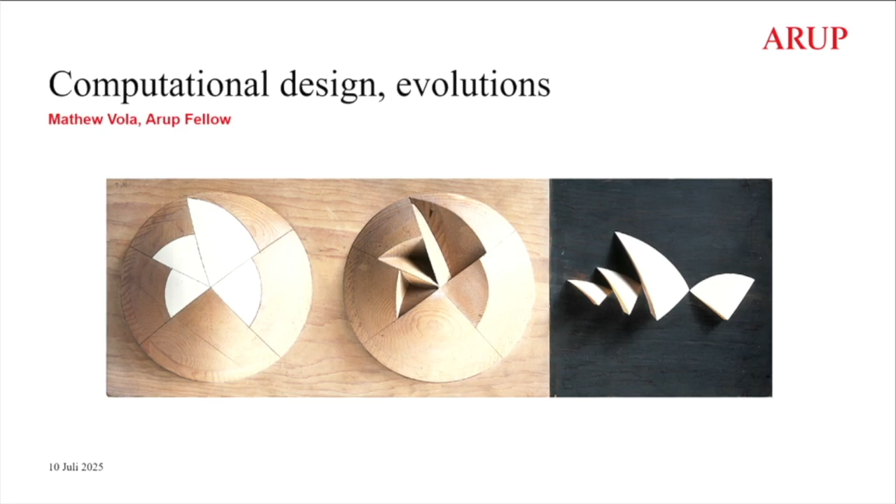We're an international firm, about 19,000 employees. But what separates us from the competition is that we are employee-owned. So in 1970, our partners said, okay, we put the shares in a foundation, and the benefactors of the foundation are our employees, that's me, and all the other ones, and a number of good causes that we believe in.

And what we've learned over the years is that if you're an employee-owned firm, then what keeps you together, what keeps unity, and that's branding. So we tend not to buy other firms, we tend to grow organically, but particularly what binds us is to drive for quality in each and every project that we do. And that's been successful. We've been growing, and growth is not a particular objective of us, but we've been growing organically for the last 75 years, and now we're at 19,000 people across the globe.

And we're a multidisciplinary firm, so we like to be outcome focused. So we're not structural engineers that just design a structural beam, but we want to think about what's the beam for, how does the mechanical services go through it, what's the objective, which people are occupying it, and that's our field of play.

The first project we used computational design was probably our signature project, the Sydney Opera House. We were a big fan of simple calculations, hand calculations, but then we helped Jørn Utzon to win the competition for the Opera House, and we just couldn't fathom to do this by hand.

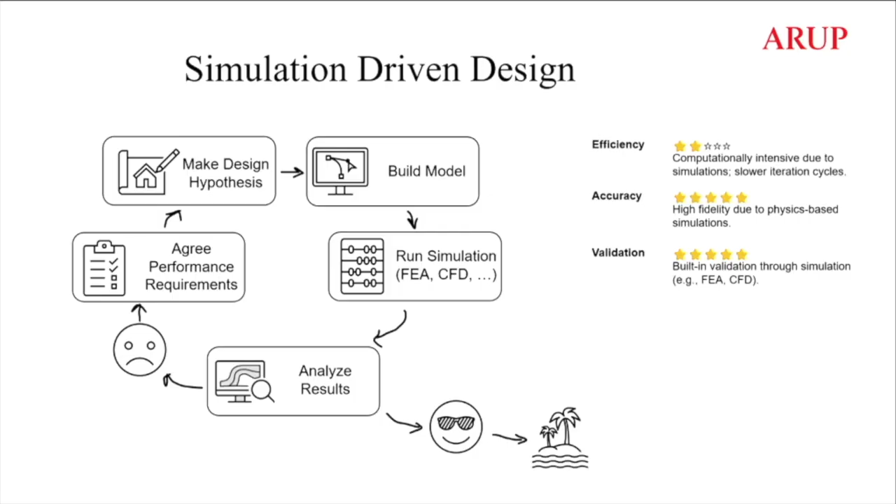If that's not okay, then you do another hypothesis, and you run cyclically, and it's iterative, and it's a lot of pain before you get to paradise.

Okay, then this was around the time when the architects learned how to do 3D modeling, and they hit us engineers with a lot of these 3D models. Can we do this? Can we do that? And basically we couldn't keep up.

So what I started doing was connecting these geometrical models through parametric design, and Grasshopper is a great tool, so we totally use it and love it, but there were other tools before that to keep up with it. So we built parametric models, so we didn't look at one solution anymore, but we could look at a solution space. Within these constraints, this is the optimal result, this is the minimum steel tonnage, or this is the one you could build. And by doing that, we could keep up with these demands.

But really, the design process itself didn't change. There was still an assumption, right? And it wasn't a design, but an algorithmic assumption. And within the algorithms, we could look at the solution space and keep up with it to get to paradise.

The thing is, if you create a solution space, if you have one single model running in an FEA analysis, the result is validated, because you have an engineer who looked at it and checked it off. If you create 100 or 1,000, and you come to an optimal result, you still need to validate it. But what we've learned through the parametric process, we're kind of certain it works.

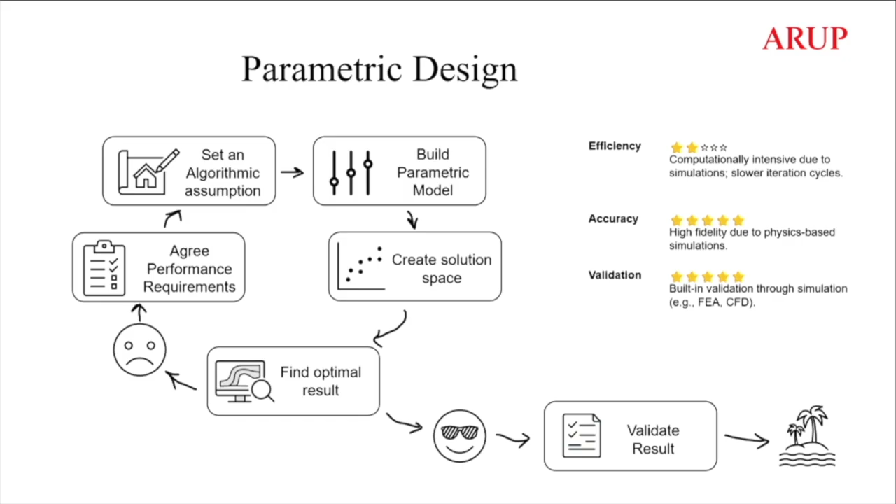And we're kind of certain to be happy, so we present the optimal result to a client, and then if we sell it, then we validate it. So that's the process. But times move on, we have to be quicker and cheaper and more lean and stuff.

And now we have machine learning, and in a way this changes quite a bit. So now we take the data. I've seen examples where data was taken from external sources. So this is the process.

Now we take the data, we train a model, we predict an outcome, but when I have that outcome, I'm not quite sure that I can present it to an external client. So now what I do is I validate the outcome, I validate my prediction before I go to the client, and if it's happy, and the client likes it as well, we get to paradise again.

But the validation part actually takes longer almost than the using of the machine learning itself, and that's a bit of a problem. So what we started doing is actually to merge those processes. And in a multidisciplinary environment where you look at environmental analysis, wind, daylight, comfort, energy, embodied carbon, all these kinds of constraints, there's a lot of different processes we're running simultaneously.

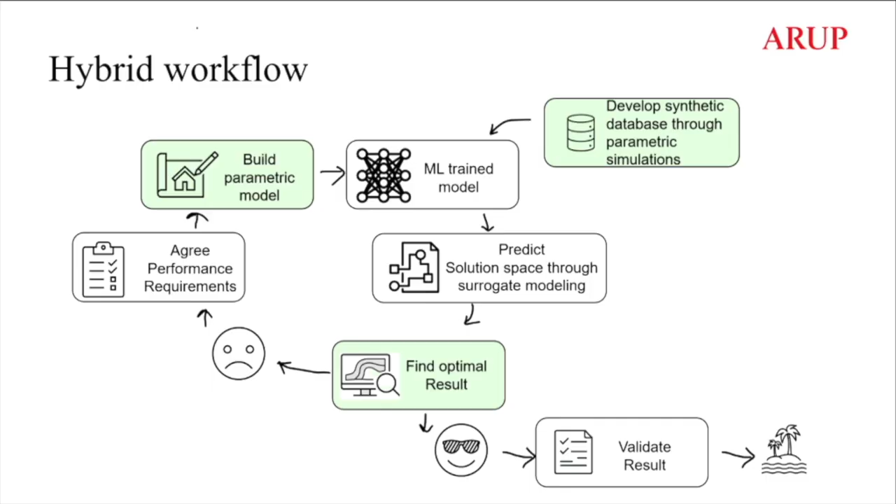But what we said is if we now use our parametric process to generate synthetic data, we can trust that database, and we kind of can trust that machine learned model as well. And at the same time, if we use a parametric model as input in the machine learning trained model, we can again get a big solution space, and understand the whole system at large, which gives us the confidence to go to our client, validate it if it's been solved, and get to paradise very quickly.

So that's about computational, and this is what we're doing for a lot of workflows. One of the things that we're very comfortable with in the Dutch environment is we train the machine learning on wind comfort. CFD analysis takes a long time, 4 hours per model. So if I'm at the stage where I want to influence an architect to maybe change a tower shape, or maybe build 2 towers instead of 1, my potential solution space is very, very large.

I'm talking about thousands of options. If I run the CFD on all those thousands of options, I cannot do it. With machine learning I can, and I can keep up with it. And then I can mix the wind comfort with structural analysis or settlement analysis, and suddenly there's a different ball game happening.

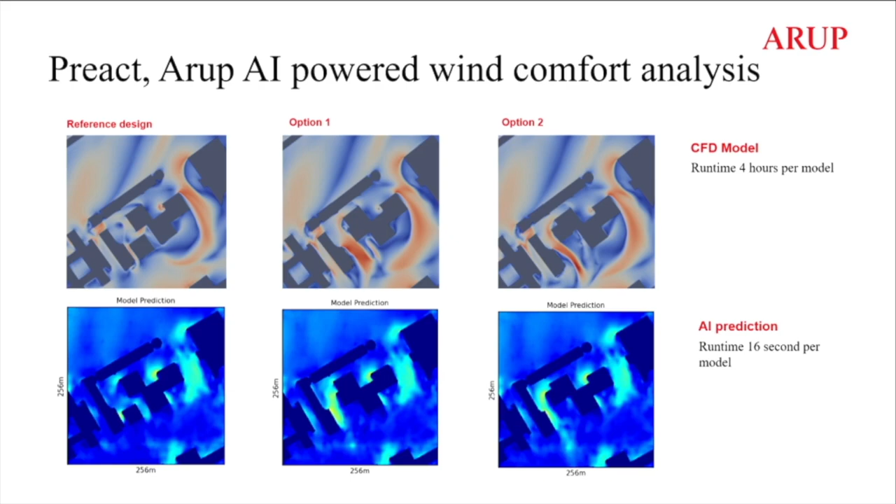And we started doing that for wind comfort. From wind comfort we're now doing thermal comfort, blast analysis. It takes us even longer to come up with one calculation in a traditional way. One column with one blast load takes us about 6,000 euros in computation costs. Now we can do it in seconds, totally unlocking that solution space for our clients at an early stage.

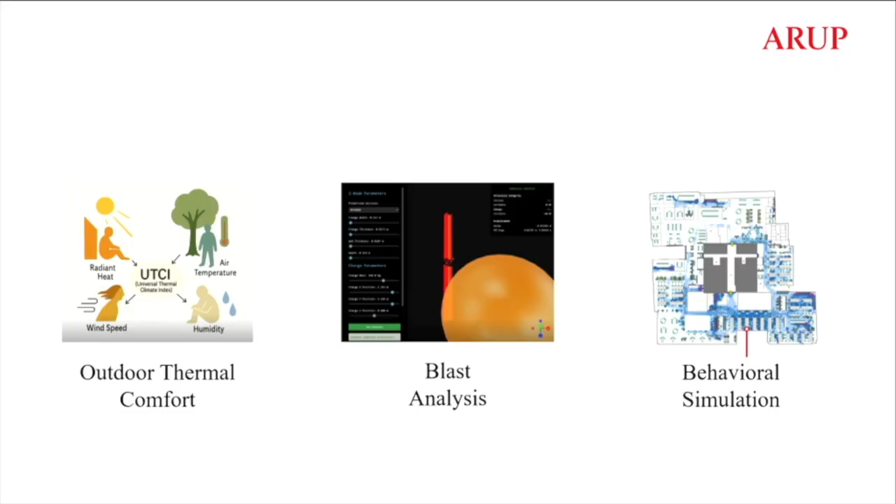And that computational power now leads us to design for more outcome-based solutions. So we're starting to do behavioral simulations. Can we design for happiness, right? Instead of anything else. That's the direction we're taking when it comes to computation.

Now, we'll park that for a minute. If you're up for it, I want to talk about design. That's probably what sets us, the AEC industry, apart from the aerospace industry a little bit, and for sure from the very specialized prosthetics industry: in our case, we have many different stakeholders. There's not one client actually making the decisions. So design, as we see it, is probably a little bit different than some of the other industries are seeing it.

So I just want to test with you. I'm showing you some images, and maybe somebody wants to give us one word for what they see when they look at this image.

Tensegrity, good word. Somebody else?

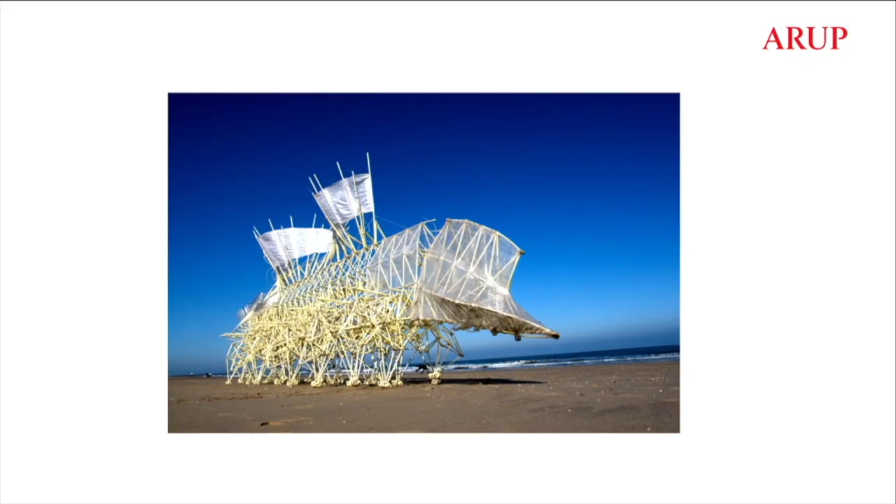This is Theo Jansen. He's a Dutch artist, and he devoted a big part of his career to making beach animals. He made them always using PVC and a certain connection mechanics, and his animals became more and more complex over the years. And he let them run on the beach.

One word? Fun. Good word, good word.

For me it's complexity. As a computational designer, I like algorithmic complexity, because anything that's not codable... and this animal is almost totally codable. It's a lot of code to actually do the one exception, unless the exception is actually the rule, but then it's algorithmic again. And I like looking for these in my designs, and it will help our database, it will help our solutions, etc.

For me, and this is important, it's about choice. So when you work in a multi-stakeholder environment with a lot of different perspectives, we have to realize that design is also always about choice.

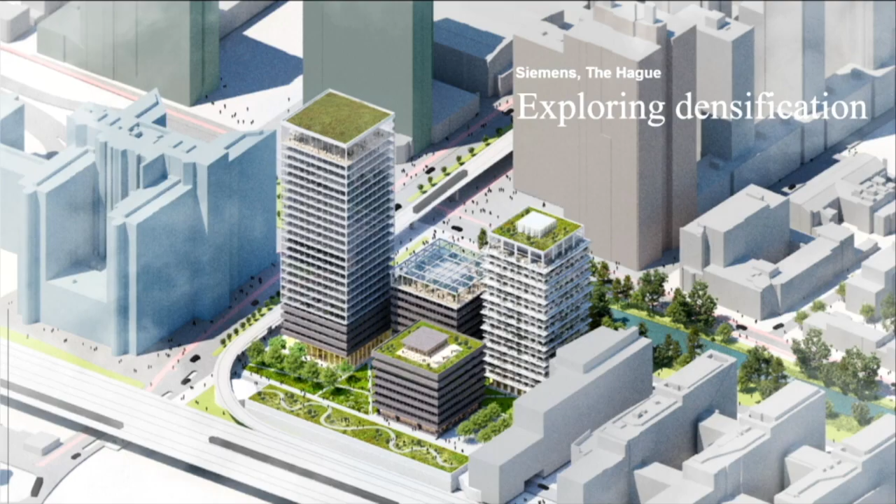And that's something I try to fix. So I got two project examples. One of them is Siemens, where we tried to do this.

So this was a densification scheme where the architect made a reference design, and that was a starting point for us. These are three existing buildings in The Hague in a quite complex location, because this is a residential area, and the residents are quite vocal about anything that changes in their neighborhood. And in the Netherlands, particularly when they're very vocal, they can stop any development happening. There's a train track, a lot of noise problems, a very busy road, a tram line, and existing buildings.

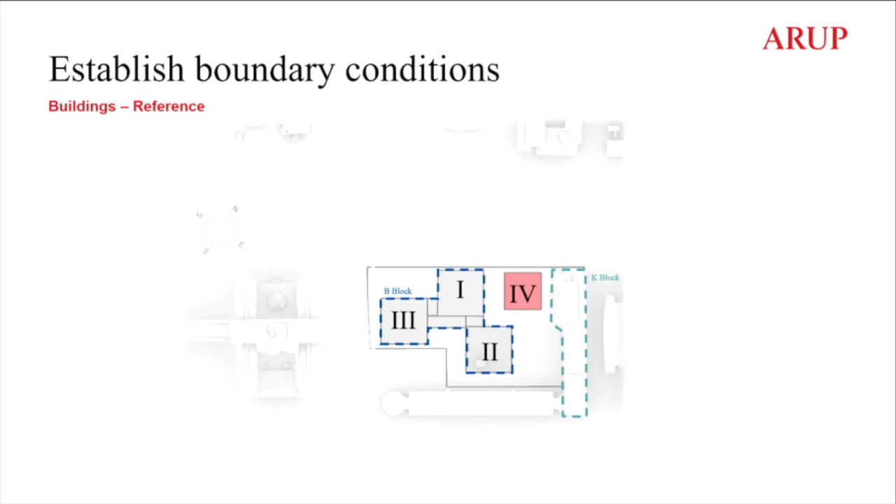And the client, Timeless, wanted to explore if they could densify the particular site, adding a commercial area and a residential area in a different tower block. Traditionally, I think it was a really good design - if you look at it from a master planning perspective, you put a building block here, there's area, this is the residential tower, it's at the street, and we build up and put a commercial tower on top.

That reference design was done, and then we were asked to bring in different perspectives - environmental, structural - to that particular mix, and we closely worked together with Timeless and NEO as the client in that Ikigai model. We took care of the engineering, and ZTDP was the architect. Then we said together, okay, what are the different perspectives we need to bring in: gross floor area, sunlight, the sun on the park, particularly sunlight on the neighboring precinct. Basically, we said they're so vocal, we don't want to put them in the shade at all.

So it was a pretty important KPI to move forward with. Also, we were going to be constructing on a live site where people had to work at the same time. So constructability was important, daylight for the residential quality, commercial as well, solar potential, because we might want to do an energy neutral building, because a lot of commercial clients are promising that they will occupy energy neutral buildings. We had to look at the noise from two roads, and this is actually a train station, so a lot of people actually passing our site as well. So wind comfort was also a very important KPI.

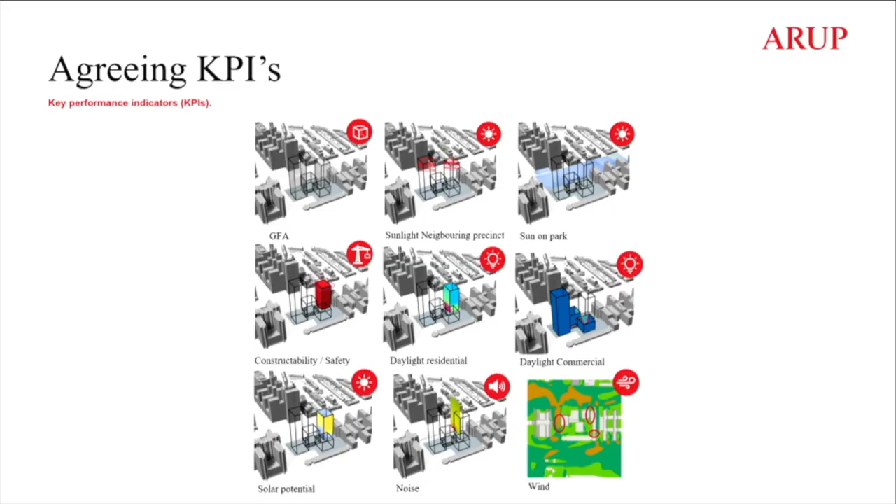Now, these are nine different sets of KPIs, all with totally different solution spaces, right? And the good thing is that we built this pre-act, so we actually used this, and this was the first time we used it in a commercial environment. We said, okay, the wind comfort we can now predict. So all the different options, we can predict the wind, and we're quite comfortable that we're going to be right, and we tested it.

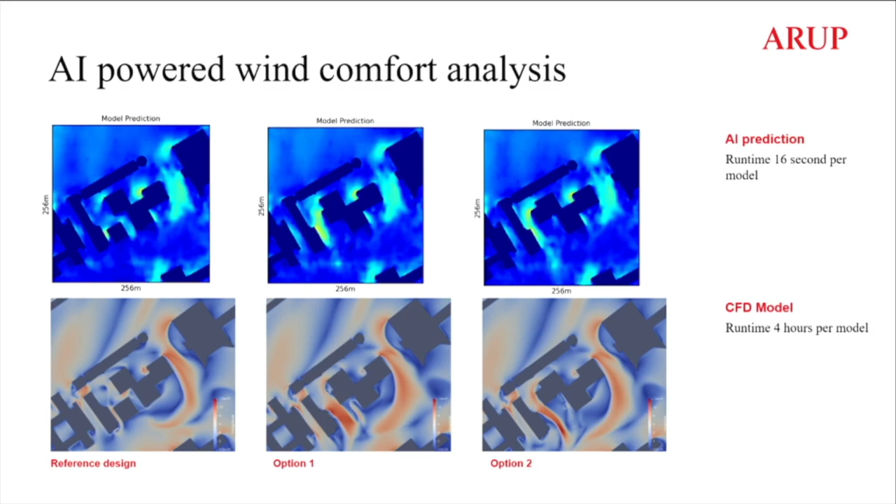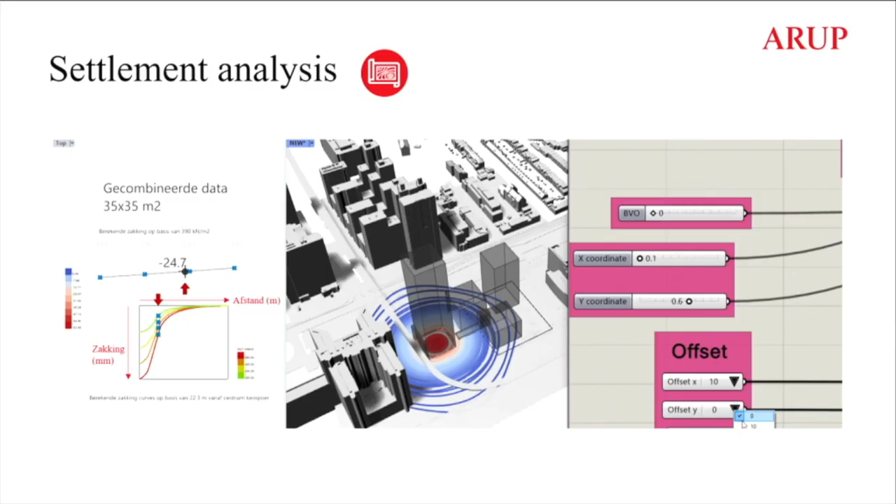We also, because of the train track, metro track here, if we would move the tower out, the metro track would start to settle. Now in the Netherlands, if you have a settling metro, then you have a lot of conversations with the people that own the metro line, and that can take years. So we said, okay, that's another KPI we put into the analysis as well.

And then basically we started to explore the solution space. You know, the client called it a lawnmower. We made different heights, different locations of both the office building and the residential building. And then we built a parallel coordinate system to test all of them, so all the solutions for the office, all the solutions for the residential.

And then they said to the architect, okay, now we restart the design. And we take all these different perspectives and see if we can find the best fit compromise, and not only looking at master planning, but also looking at all these other ones, including settlement, wind comfort, daylight, etc.

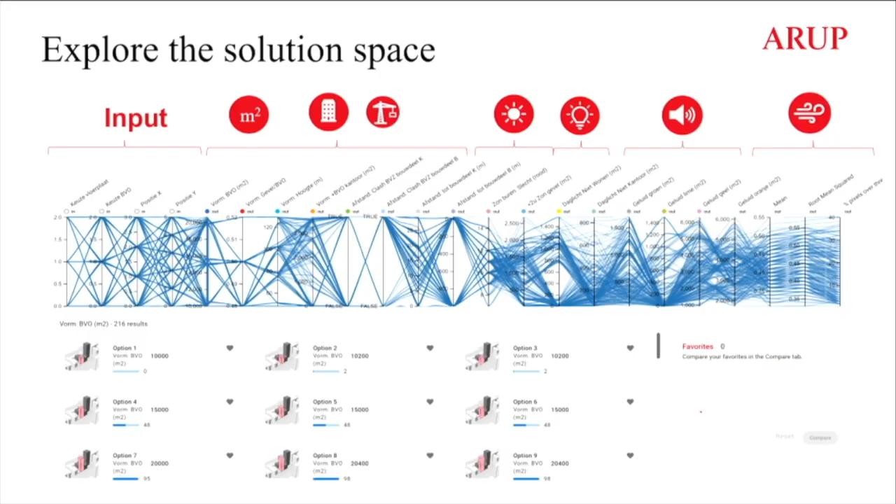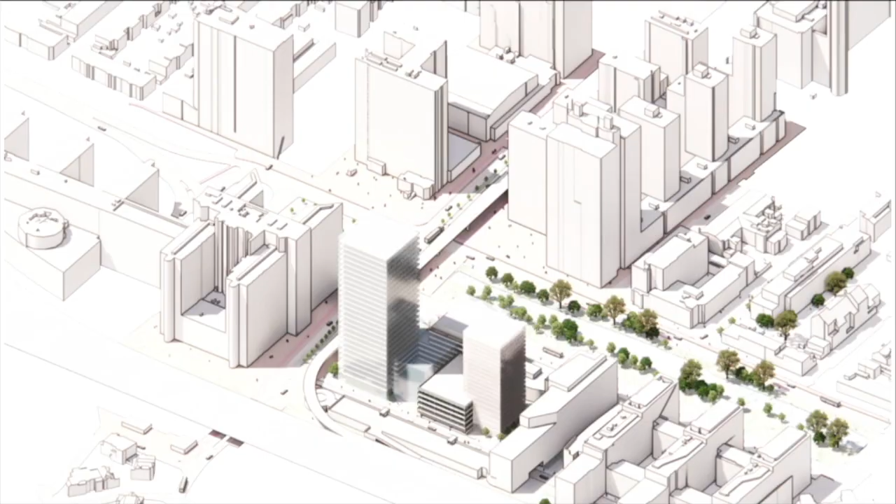I won't dwell on this a little bit. And the outcome was totally different, right? So one thing for the residential was we found, well, we learned through this analysis that if we would put the residential building back, we didn't need any deaf facades. So a deaf facade is when you can't open your windows in your residential apartment. So pretty important KPI for the end user of the building.

And if we had to put it on the road, this facade had to be deaf. If we put it on the rail, that facade had to be deaf. In the middle, it was fine. So that became a very important design decision that eventually led the architect to say, okay, you know, we'll do it differently. We'll make a nice square here and create a different environment.

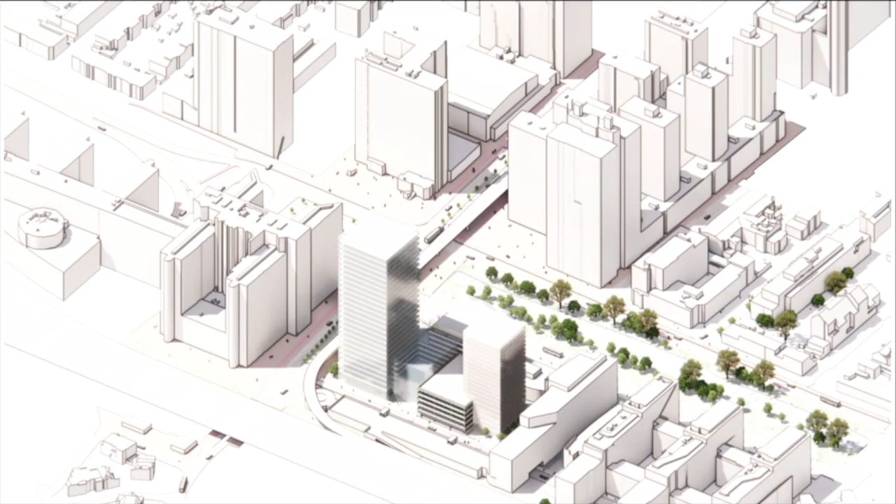Same goes with the commercial tower, which we moved in the back. And actually, by moving this one back, the whole wind comfort at the back side improved significantly, right? Creating a safe space and a happy space for the people to move daily from the station into the zone, which made the government very happy, right?

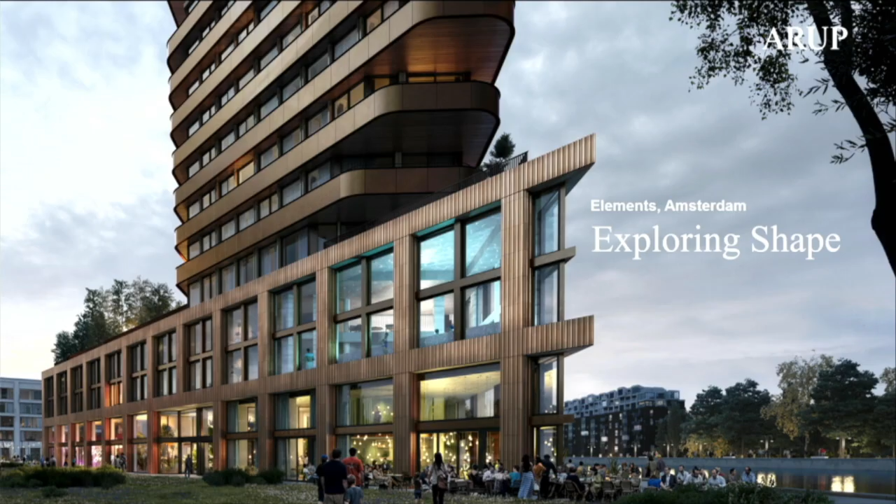So that's one. So that's actually using computational design technique in a collaborative environment to decrease the risk and come up with the best fit compromise solution.

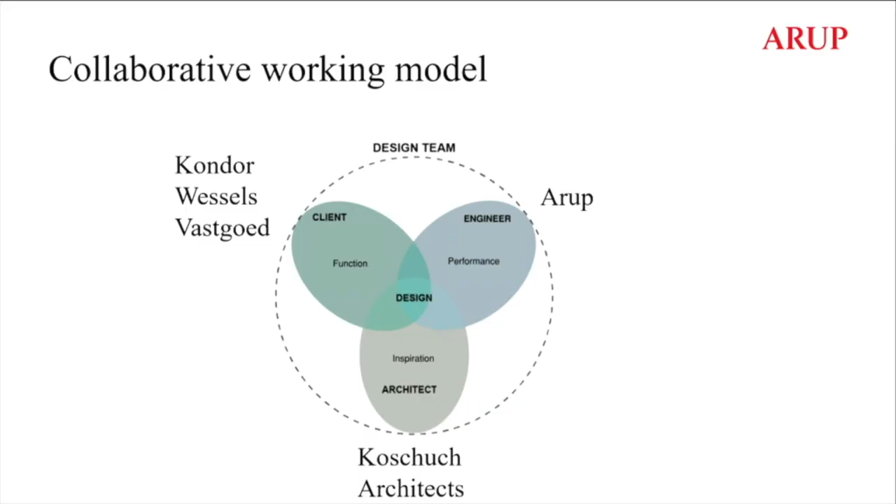Now we set up this Ikigai model, in a tender stage. We had six weeks, not a long time, so we said we keep it small. We take responsibility each for their own work. And obviously designers make a lot of decisions, some of them implicit, but here we said, okay, before we start the design process itself, let's set up what we need to do.

Because in the end, a design is always a marriage between the boundary conditions, the constraints, and the ambitions, right? Let's do a parametric generative script. We look at all the solutions, generate all the solutions, we do the analysis, and then look at it, similar as we did to the Siemens result.

Before we started this whole process, we read the tender documents and asked, how are we going to score the most points in the tender design? We decided to set 2 KPIs for building sustainability, 2 for neighborhood sustainability, and 2 for planet sustainability: daylight and sunlight for the building, good wind conditions and green space for the neighborhood, and energy performance and material for the planet.

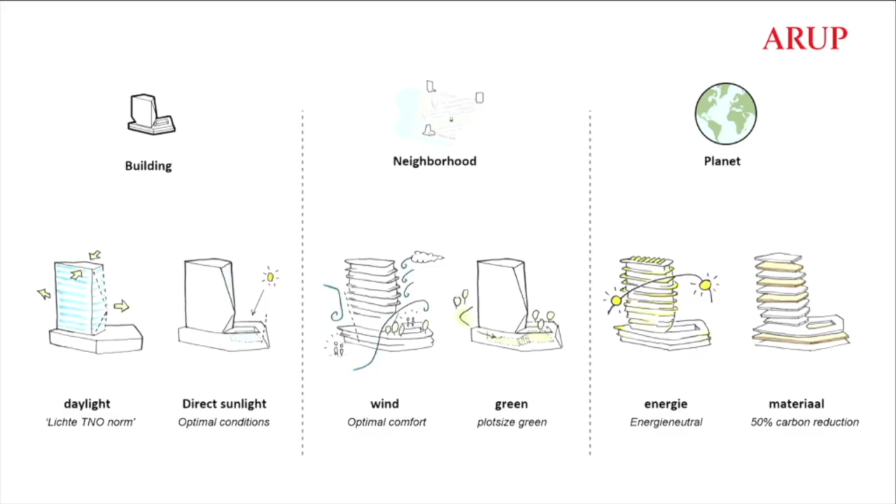This building was in the same neighborhood, the Amstelkwartier, and the tender before that was the HAUT project, a total timber tower, which we also won. So for this one I thought we'd focus on energy, since we knew we couldn't afford a full timber tower on this particular location. We took 50% instead of 100%, focusing on the first energy-neutral timber residential high-rise building in the Netherlands.

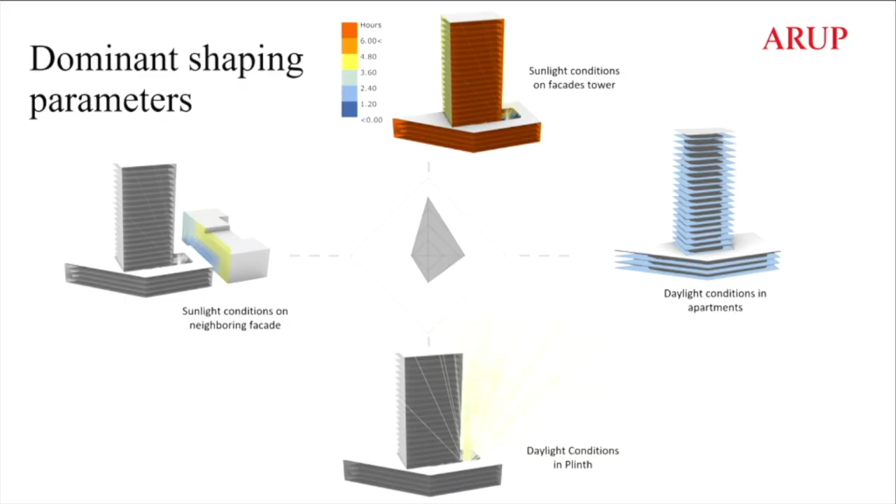Then we started looking at what shapes we could do. This tender was nice because any shape would be acceptable according to the government's request, which isn't always the case, so we had a lot of freedom of shape. We explored different options. The government gave a reference design, saying this is what they thought should be done, but looking at the KPIs, we started exploring different options in an algorithmic way.

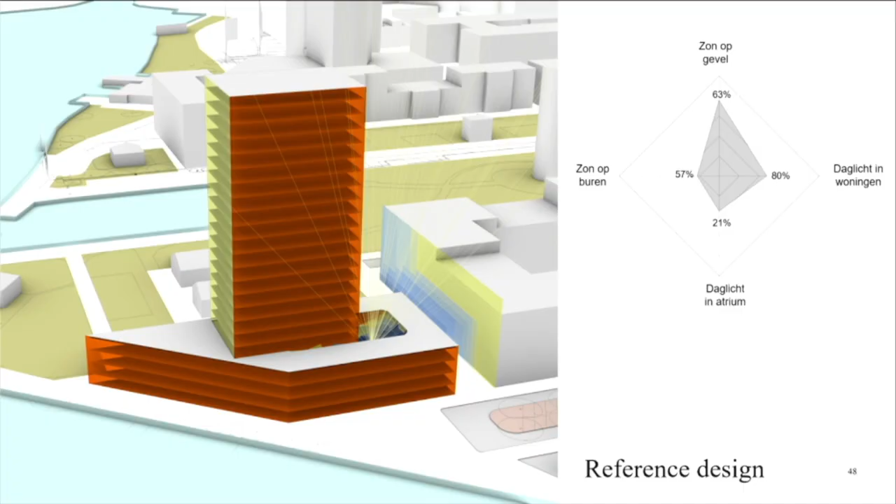We found that if we want optimal daylight in the plinth building and for the neighbors, we want to move the building as far to the tip as we could get it. Then, to generate enough energy, it actually started to pull the east and west facades apart, making a very fat building with a lot of facade on the east and west side, where you get energy in the morning and evening when most residents are using it.

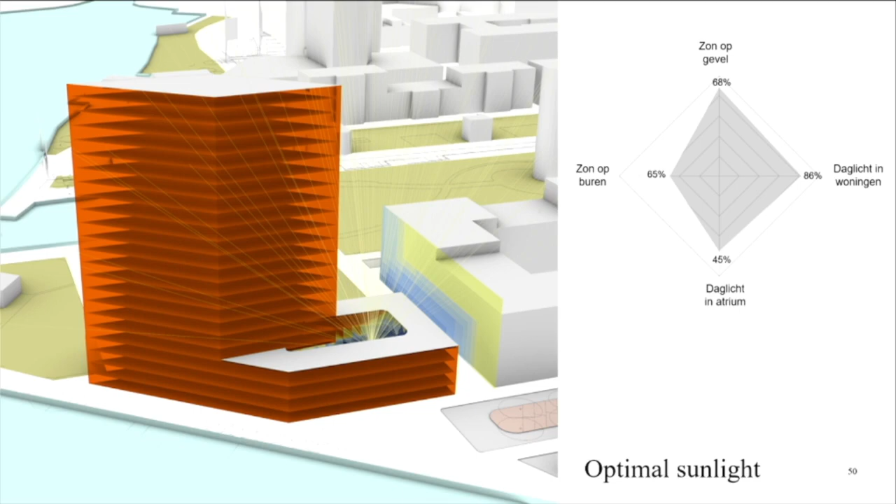What the algorithm found, and these are just some snapshots of it, was that it started to shave the building here and there. That's because when you build like that, the wind hits it and you get very nasty wind conditions on the southwest facade. So it shaved it off so the wind could find its way at this level instead of hitting the tip directly. It still hits it a little, but this was the best-fit compromise solution, the last algorithm we ran.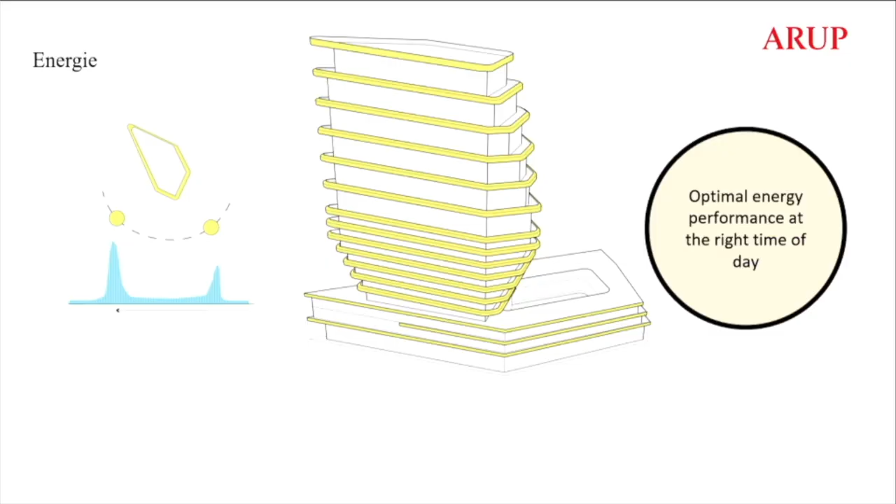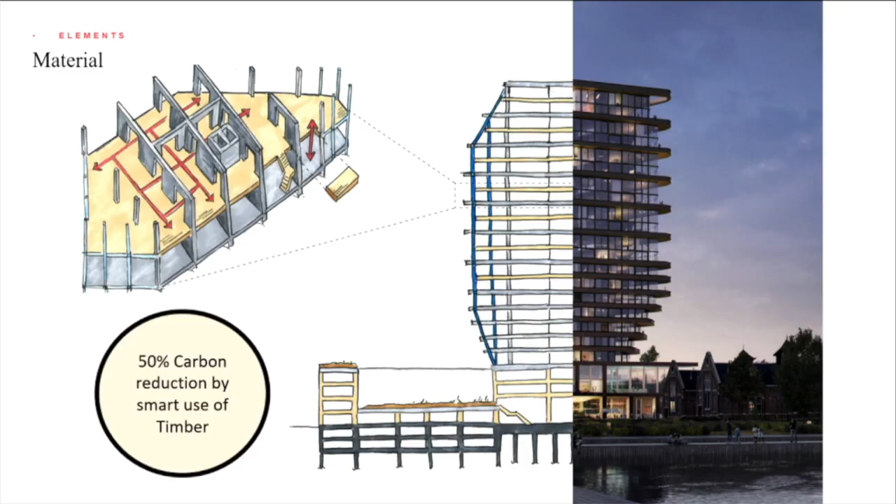Then we said, okay, we won't put timber everywhere. Let's make double-height apartments, and every second floor within the apartment itself we make in timber, because then you avoid the problems with acoustics or fire, which we thought was a very good solution at the time, and it met our carbon requirements. These are literally the slides that I presented to the client.

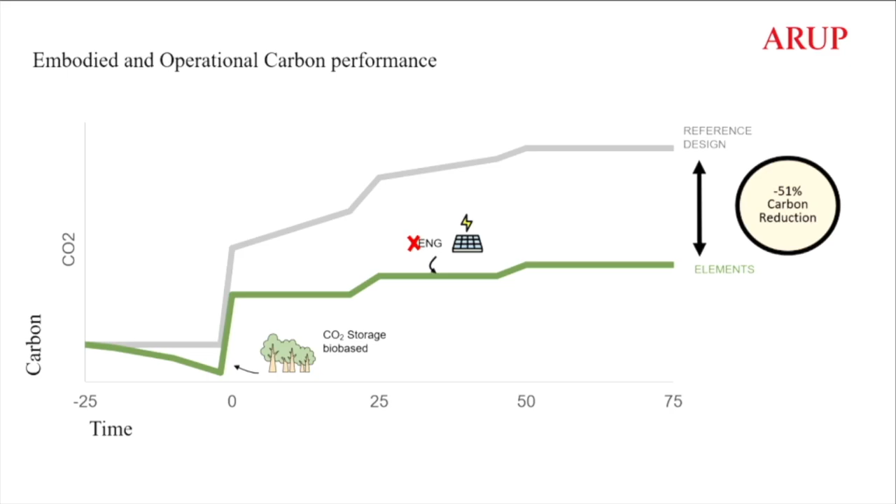As an engineer, I often do these types of competitions with architects. This was the first time ever in 20 years that I got to present before the architect. I presented exactly this, and then the architect said, and we're going to make a great building out of it. I want to share this video with you to show how the architect and the developer experienced this process, where we didn't do the traditional design process, but rather a computational design process.

It was quite difficult because it hadn't been done before. We had the ingredients of sun, wind, and water to take into consideration. Sustainability was the first thing to go by, and architecture came afterwards. But of course that brings up discussions about what a building should be.

It had to have good daylight conditions and good energy performance. We wanted to make an energy-neutral building and boost the biodiversity of the site itself. We wanted to optimize the wind conditions, prevent shadowing of the neighbors, and have good materialization.

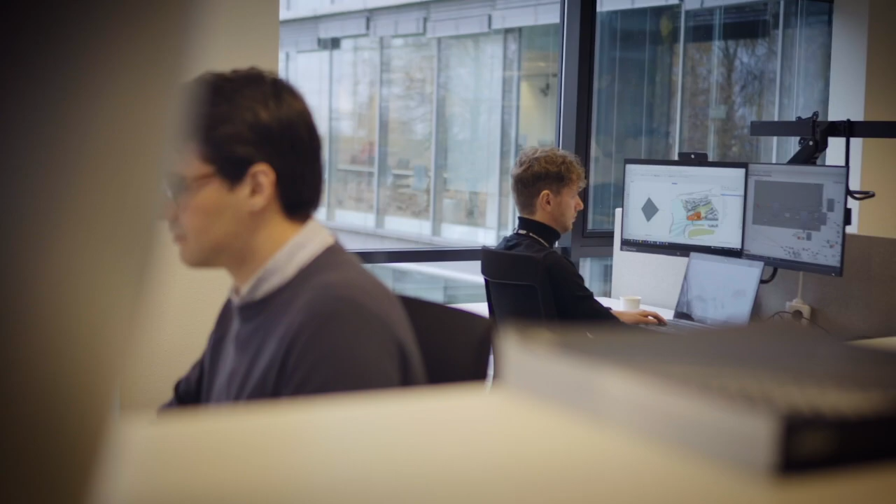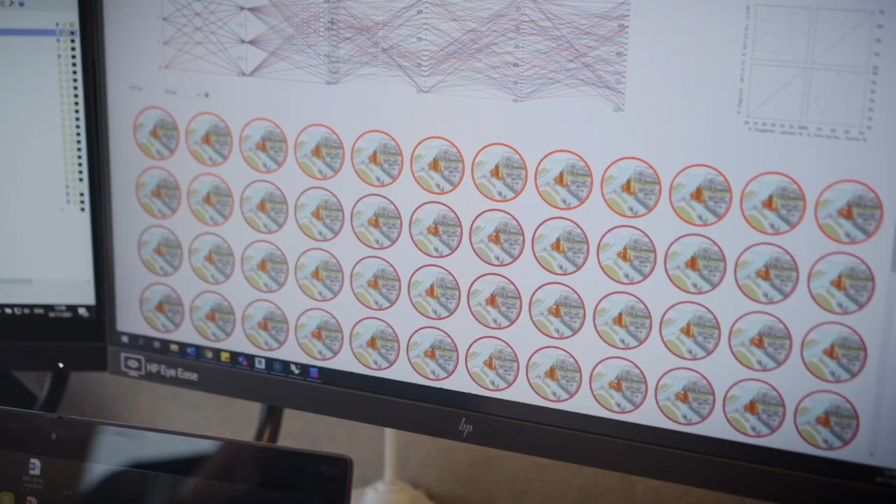The biggest challenge we faced was to come up with an integrated design that provided a solution to all the sustainability requirements we set ourselves, provided this aesthetically pleasing building that was also functional, and had a closed business case.

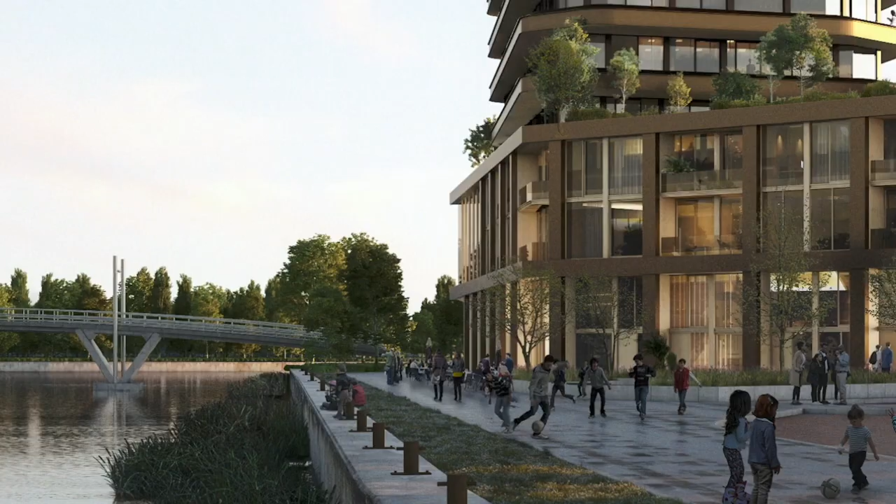What we did in the first phase was more of a classical approach into urbanism, looking at the context, shaping the volume within the building envelope. And we had a stepping building that made the connection to the surroundings on one hand, and then really established a relationship with the tower to the surroundings.

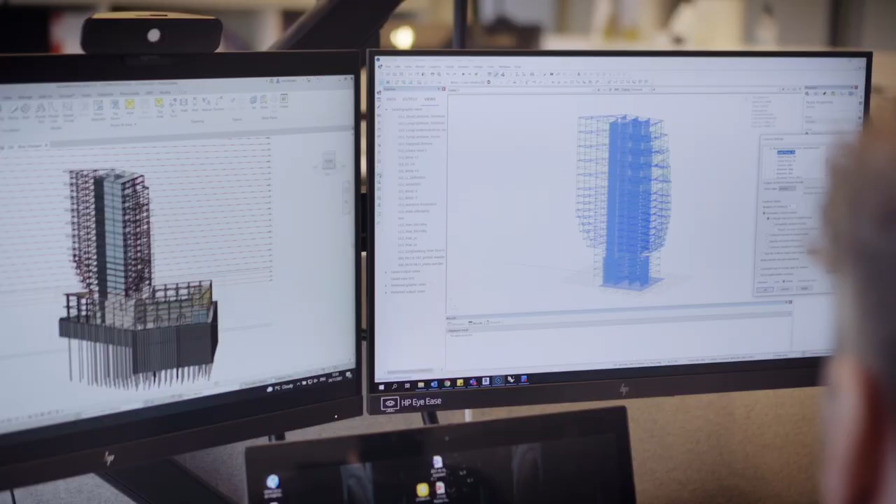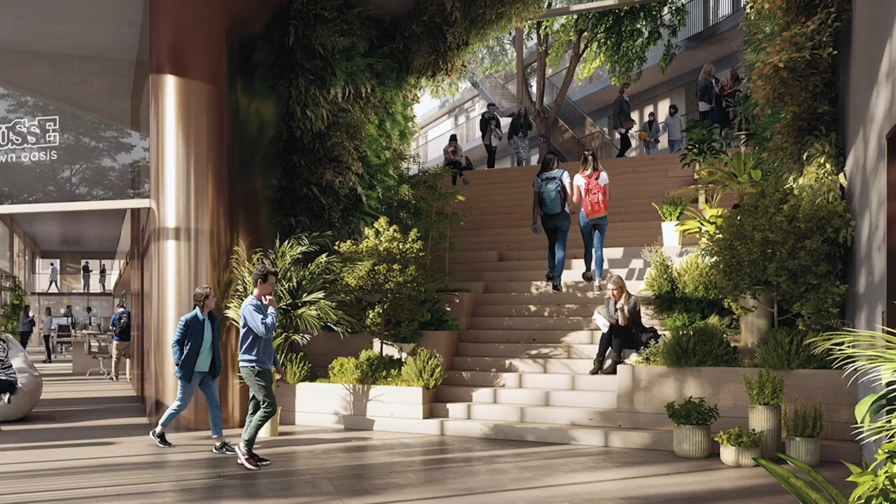The first results of the parametric approach, to me, were pretty amazing, because it was the opposite of what I expected. The power of parametric design is that it involves all elements and maximizes the experience people have in their own home, and that contributes to more healthy living environments for people.

In a traditional process, the architect takes the lead in coordination and comes up with a shape. Sustainability requirements are becoming much more important. So with the paradigm of form follows sustainability, the design process itself changes, where everybody is much more integrated, involved with the overall shaping of the building.

You really have to look at it with an open mind and see what the benefits of the solution being offered are. There was a lot of good we saw in it, but it's also like humans against machine in a way.

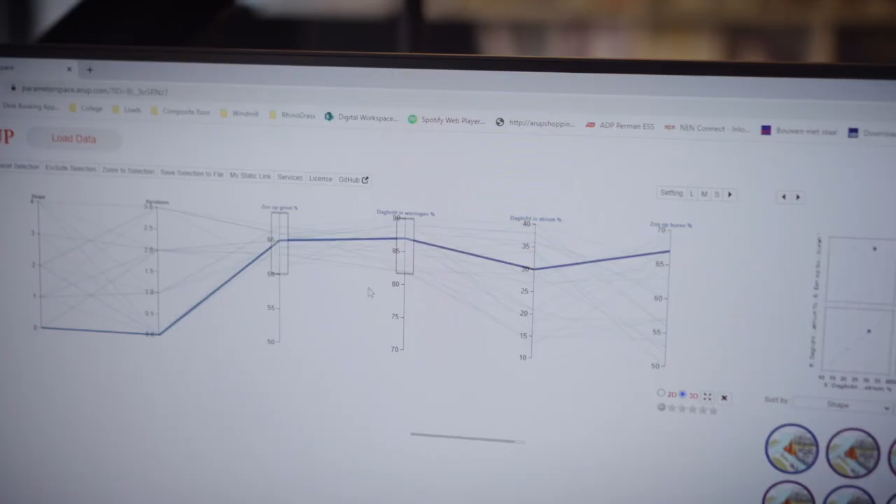Something we learned from this unique process is that the role of the architect changes, but he's still very important for the process. I think at the end of the day, it's a merging of both. It's not the machine taking control, like a computer fed by parameters, but it's really the interaction of urbanism, typology, and learning from machines as well.

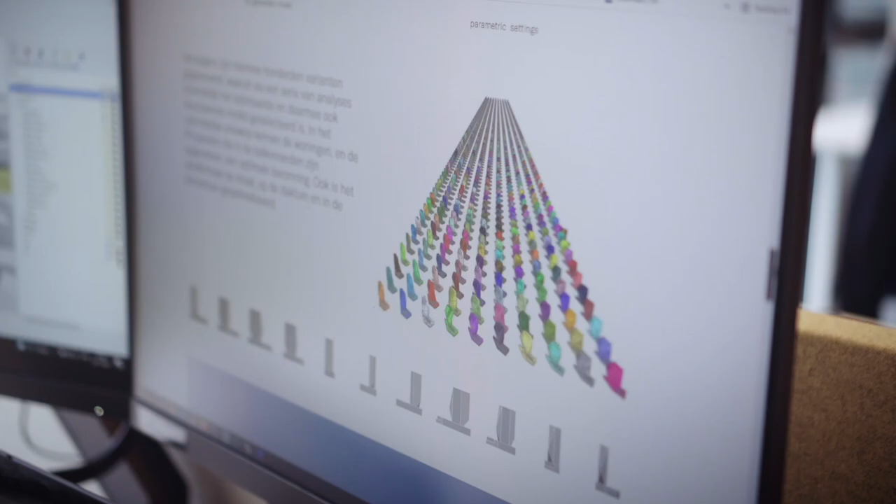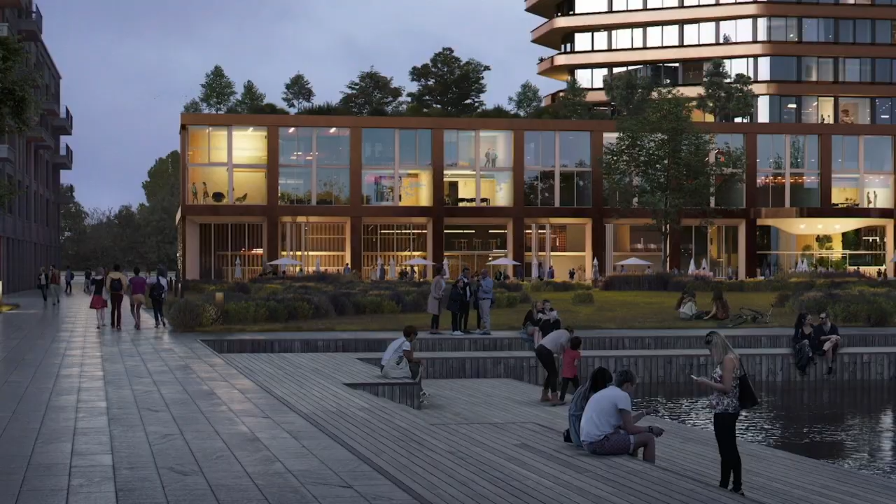I'm actually thankful for two things. First is the open-mindedness of both the client and the architect in looking for a new way of exploring the best possible solution for this fantastic project.

The other thing is the perseverance. It wasn't easy and we clashed, but particularly the client held on to the perceived quality that the building had to have, and pushed us as far as we could go.

It was a small team, but I think we came to know each other quite well. We made a lot of hours before coming to the final design. It became a friendship, actually. It was a mind-blowing experience.

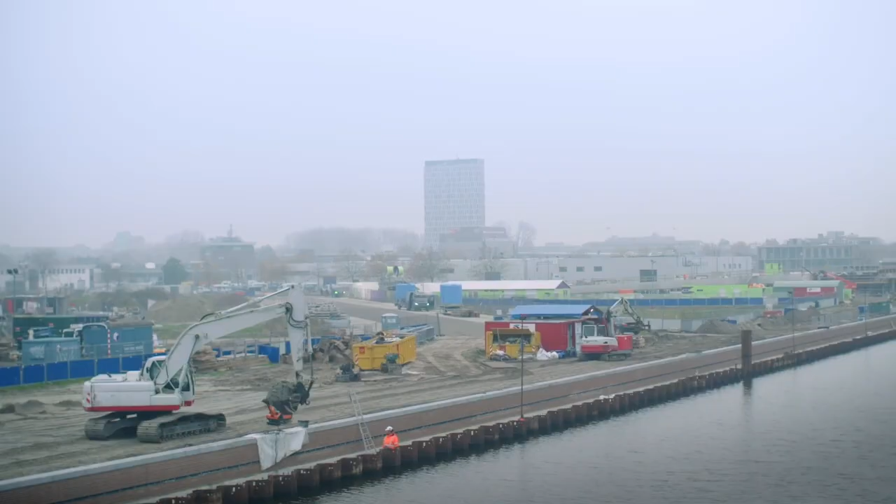Here, because Arup obviously had a big role in the process, I really embraced it, joining them as a team, trying to make each other better and exploring new ways. So I'm super proud of what we're going to achieve and what we're going to make: an energy neutral high-rise in Amsterdam, which is unique.

So we won the tender, and sometimes it's close — this one wasn't so close. Very happy with it, and we're now constructing it.

One of the learnings is that when you win a competition in the construction industry, you win something, and then it's built a couple of years later, and the world changes, right? So we won this before the war, when the real estate market was at its peak.

With the decisions we made then, we might not make them again, because from a materials point of view, a construction point of view, it's a pretty complex building — a cantilevered building, steel, timber, concrete hybrid structure.

And we found that the double height spaces were also very, very special. But then again, I don't think we would have made exactly the same decisions if we had run the process itself now.

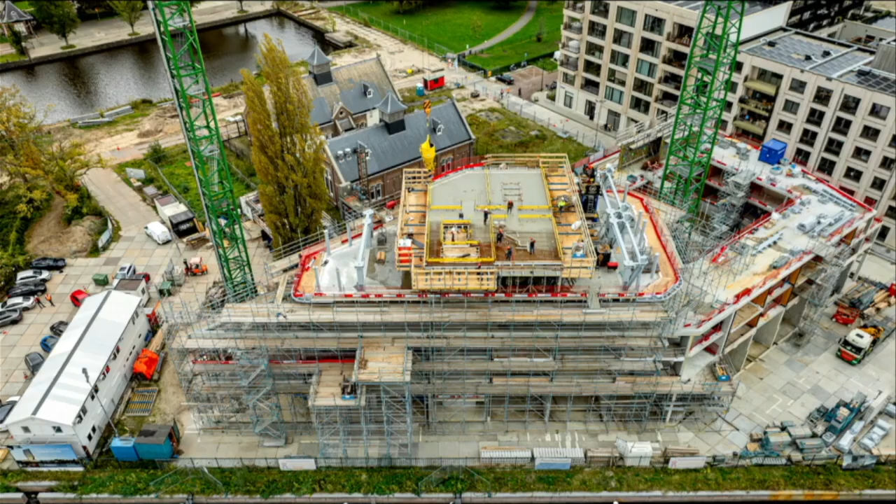And then, obviously we're constructing it now. This was a 6 week program, and we've been working on this project 2 years after that. So all kudos to the engineer, one of the engineers still working on it, making sure all the rebar gets into the right position and gets it done.

So thank you for listening.